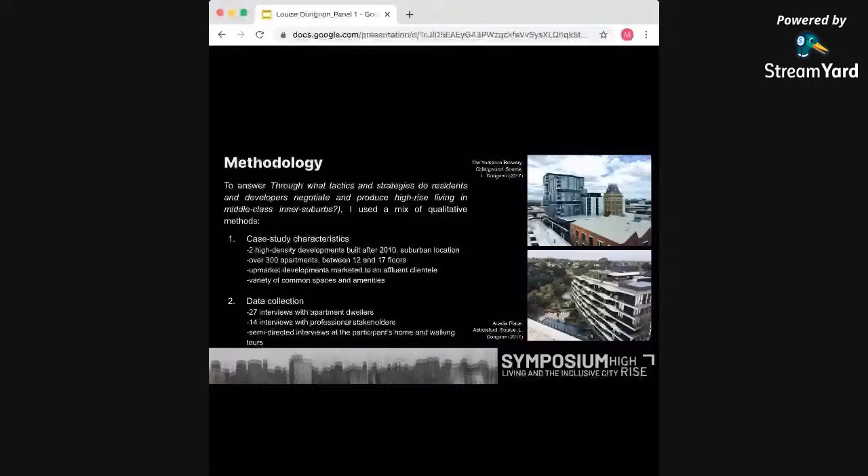To develop the research, she did fieldwork in two high-rise buildings. This is not a very spectacular high-rise building — not the kind of building you see in London or Sao Paulo — but it is very high and has a very big footprint for suburban Melbourne.

The two buildings consist of 12 and 17 floors. They were built after 2010, and they cover about 300 apartments. They are upmarket developments with an affluent clientele, and they have a lot of common space and amenities such as pools and gyms.

Louise did around 40 interviews with apartment dwellers, but also with professional stakeholders. These were semi-directed interviews with participants at home, or during walking tours around or inside the buildings.

The main findings — you can have a look at the thesis of Louise, which is available at the web link on the screen. What she found is that competing actors all work toward the co-production of high-rise living spaces and culture.

So high-rise living is not something given — it is something constructed, and this construction is based on the relationality of the built form, the building, the design, and the kind of people that live in these places, so the middle classes and the status of these middle classes.

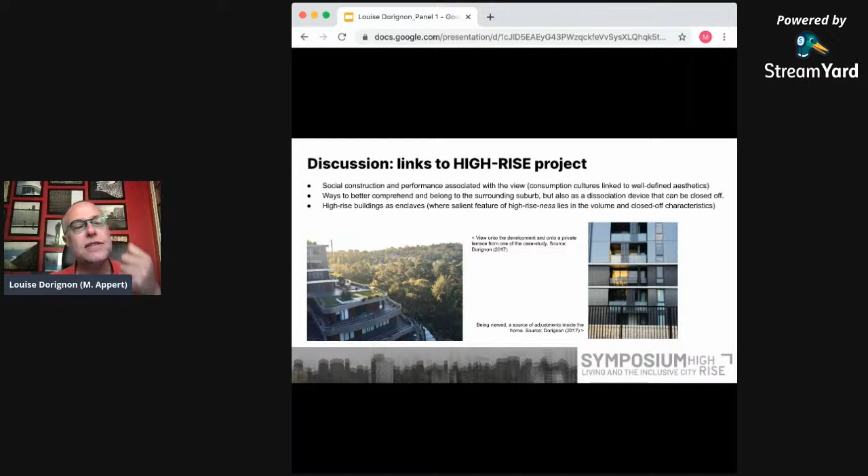And also the view can participate in the interrogation of the high-rise as an enclave, because the view can prevent people from going out or from experiencing other parts of the city, because they have, through the view and through the surrounding landscaping, a lot of attributes that are considered local or also global, but they can attach a value to.

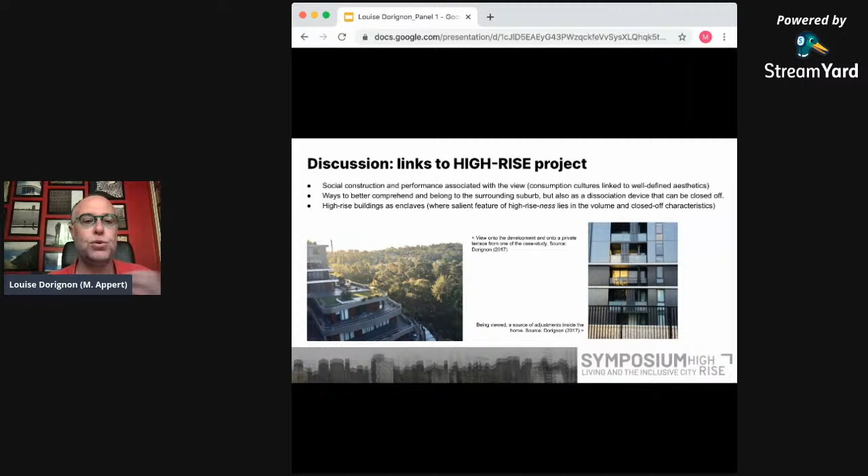And I think I'm done. I'm sorry for the very chaotic way of presenting it, because this is not exactly my work. So I tried to do my best to be as clear as possible, but it is not my initial text. So thank you very much for listening to me.

Thank you very much. It was extremely clear and objective, and I thank you for all the effort to resume and present somebody else's work. Thanks a lot.

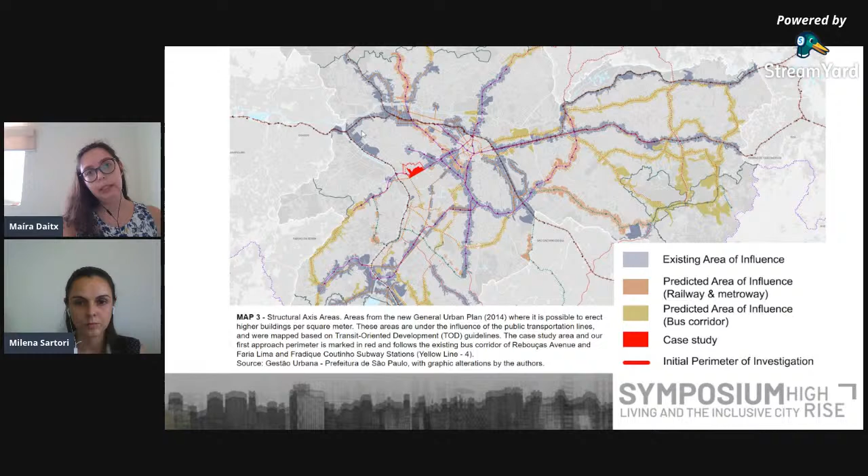So as you can see here, in light blue or purple, and in yellow, are the axes that are supposed to receive more high-rise buildings than the inner neighborhood areas, okay? And our area is one of those.

Our area has 2 metro stations. It's already a fully consolidated area, I would say. We have a lot of vertical buildings on the east side that were built mostly during the 70s, and some spread high-rise buildings here on the west side that were built in different periods of the verticalization process of the city, since the 50s.

We have 5 bicycle lanes in red and 3 main streets related to the production of our high-rise buildings recently: Rebouças Avenue, which went through an important landscape transformation in recent years; Faria Lima Avenue, which leads to a financial center concentration here with a lot of business going on, and people living in these areas normally work in areas related to Faria Lima; and Pinheiros Street, which is the area that concentrates the new restaurants and bars of the neighborhood.

And this is a small, low-density area that is now protected by law, so it's under heritage regulation. So this area, which was before within the axis limits, won't be verticalized anymore.

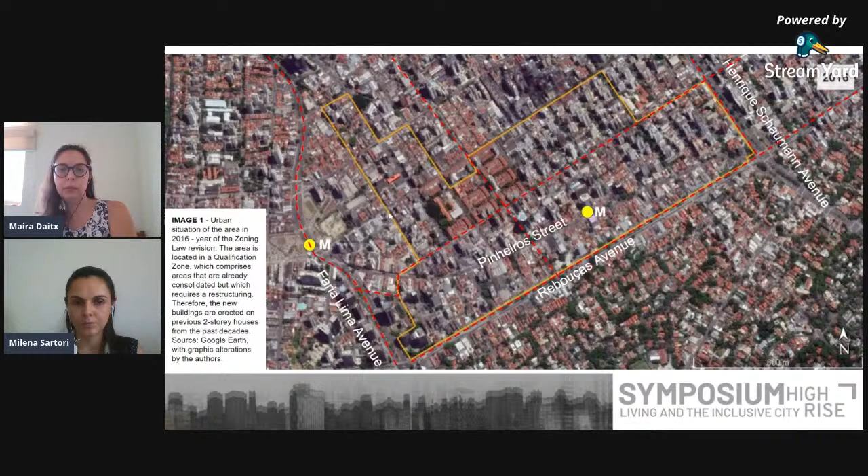So they are more popular, and also this is the part of the area that is cheaper to live.

We have the area that has been through a gentrification process. There were a lot of residential units that were transformed into commercial units, so they occupy both storeys of the buildings, and they have a lot of alternative commerce and also bars and restaurants.

And the old mansions that were concentrated on Rebouças Avenue, in this area of the city, were mostly transformed into offices and clinics.

Along with that, we had a lot of high-rise typologies, old ones. This one is from the 50s period, where you have mixed use. They normally don't have leisure areas, so they are simple apartments with no facilities like swimming pools, gyms, that you can see in the other, more recent buildings.

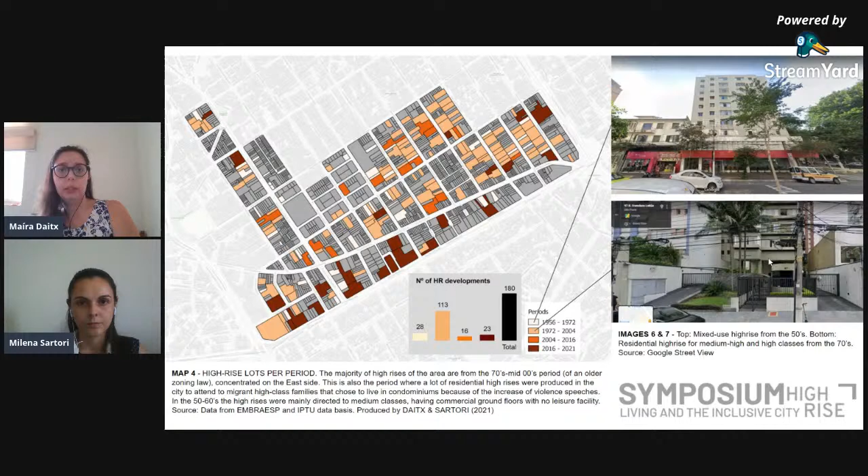The majority of the area has this kind of typology that is fenced or circulated by walls. They are high-income typology, so you have 1 or 2 apartments per story, and they are also concentrated on the east side, which is more residential.

This is the typology of the 2000s, where they are really similar to the one from the 70s, but you normally have a distance from the sidewalk to the entrance of the building. You can create more privacy for the residents, but also it's privately controlled, so this is not a public space.

And this is the most recent typology. As you can see here, you normally have the first floors occupied by offices, clinics, and stores. Part of them is active facade, and the apartments are on top of this basement of the whole building. They are all mixed use, most of them. We only have one that is not, and they all have the same look.

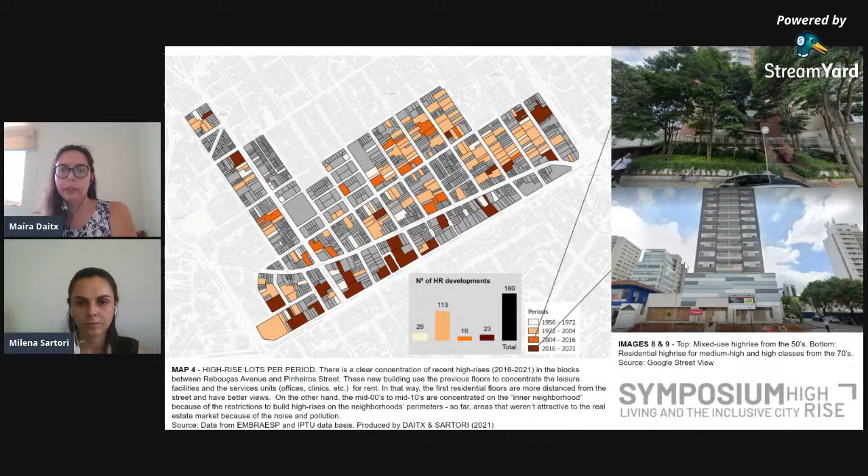So in Pinheiros, you can see normally all kinds of typology in the same block. You have new buildings, older buildings, medium buildings, and low rises from different types of uses in the same block, on the same street.

Sorry, I see part of our presentation is not showing here.

Now I'm going to explain a little bit what differences this new general plan brought to us, and the alterations of the zoning law in 2016, because that in a way directed a lot of the market in our area, especially in the areas I told you about along the Rebouças Avenue.

Our general plan focuses on trying to create sustainable urban development. For that, they decided to disincentivize automobile ways of transportation and incentivize public transportation.

So in the new buildings of the area, they say we have a maximum of parking lots of 1 per housing unit. Before that, it was mandatory to have 1 parking lot per housing unit. Now you can have housing units without any parking lot.

They have a minimum sidewalk requirement, so you can increase the quality of mobility for pedestrians. And they have incentives for donation of part of the land lots to public fruition, which could be on the border of the buildings along the sidewalk, or in the internal areas of the plot.

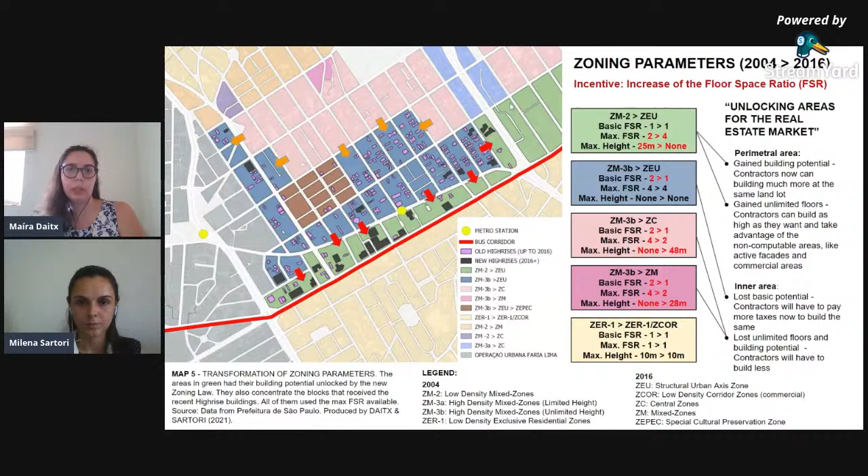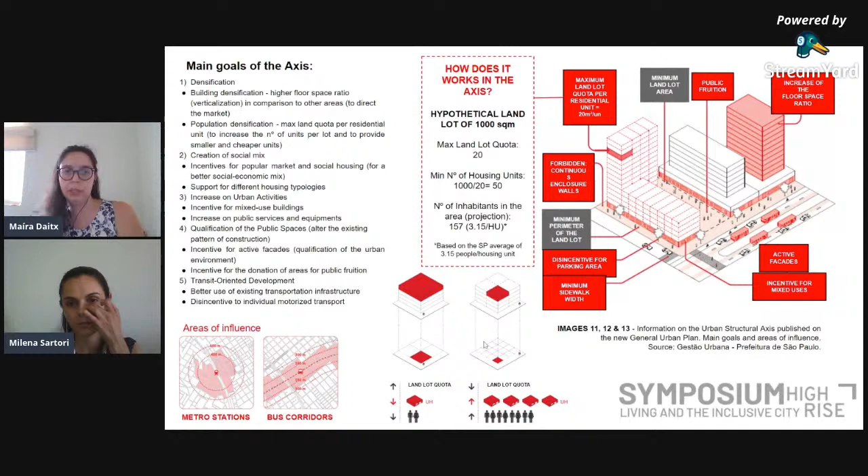Another important increment in the new general urban plan is that they created a minimum number of housing units per land lot. So if you have a land lot of 1,000 square meters, with a max land lot quota of 20, that means you'll have a minimum number of housing units of 50, which increases the density of the area. So compared to before, you can have more units for the same area of land.

We evaluated how this land lot quota was present in our area, even before the implementation of the law. We saw that in the areas on the east side, which have unifamiliar and exclusively residential high-rises, the land lot quota is really high. So you have a lot of apartments that are really big, with only 1 or 2 per floor. Their areas are bigger than in the other part of the zone. So this is not the ideal neighborhood that the new general plan wanted.

They created incentives so that contractors could create new high-rises with more units, and the new buildings correspond to that demand. As you can see here, the average land quota per period decreased a lot in the most recent period of the zoning law. Also, the number of housing units released in this recent period is almost equal to those released during 30 years of the previous period.

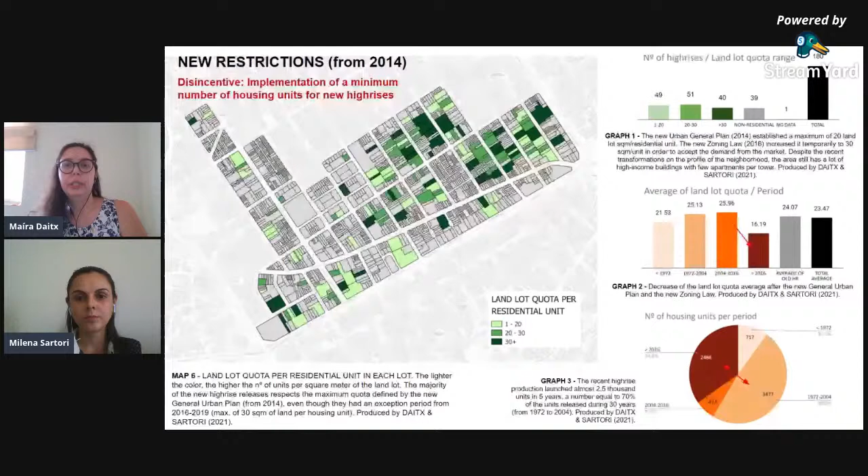Another goal of the general urban plan was to create a socioeconomic mix and include social housing and popular market housing in the central areas of the city, including the axis areas. One means to that was also the land lot quota, where once you have a minimal number of units, you would create smaller units, which would also be cheaper, so people could afford them more easily.

We know this didn't happen, at least not in the area of Pinheiros, because even though you have smaller units, this is the minimal area of the high-rise buildings. So you have apartments with 22 square meters and apartments with 240 square meters. You have micro housing in the area, but also a lot of big housing apartments. The price of these units is still not under the limit that the public bank can fund, so we wouldn't call that popular market housing.

So even though you create really small units, that doesn't mean we'll have a socioeconomic mix in the area, because these small units are actually being sold to high income classes, or to private investors. One example is that our area has private buildings owned only by a company, not sold to the population. The company manages all the apartments for high income rent. The result of this is that we don't have a social mix in the area, but we do have the implementation of different lifestyles, because the people who live in these buildings normally have higher mobility from one city to another, which confronts part of the lifestyle already present in the area.

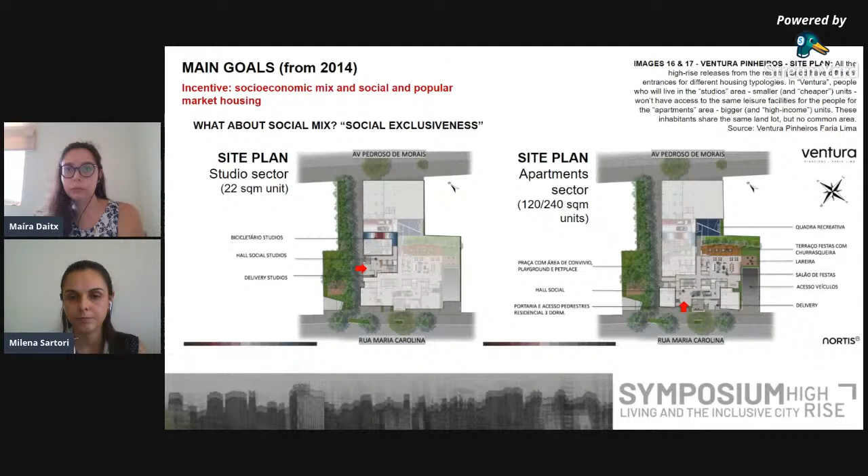Another important point of the new general urban plan was to incentivize mixed uses on the axis areas. As we can see here in pink, all or almost all of the new high-rises were mixed use. They have housing units, but also areas for stores on the ground floor, and some had offices or spaces for meetings and clinics to rent on the first floors. This was an actually really interesting upgrade from this new general urban plan.

But what we saw when visiting the areas is that part of this mixed use is exclusive for the dwellers of the buildings. So you can go to, for example, a restaurant on the ground floor if you're a normal person, but the people who live in the building can have access to the same meal in their own apartment. So they have this kind of differentiation.

Another thing is that there are some new high-rises where the ground floor was transformed into a mini mall—a mini shopping mall that is privately controlled. You don't have a direct relationship with the sidewalk or the public space. And that reproduces the exclusivity logic that we have in our cities.

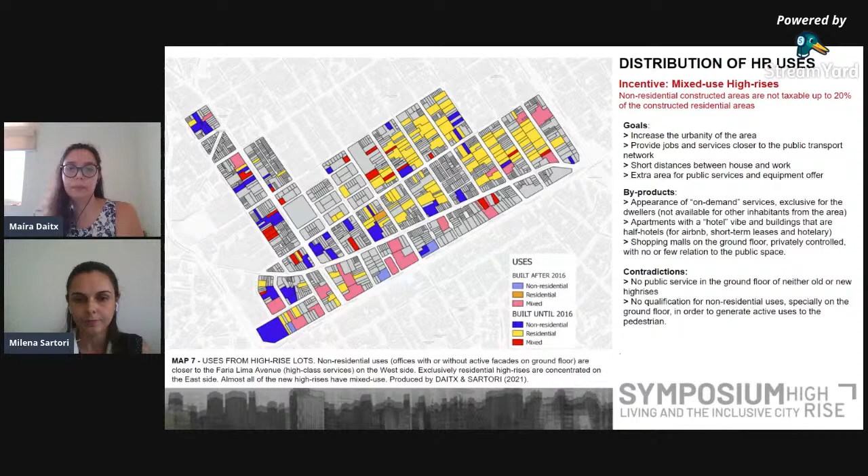Well, the qualification of public spaces at the building level takes place based on four main parameters: the donation of areas for fruition, the establishment of a minimum width for the sidewalks, and the incentive to active facade with consequent restriction on wall closure. The donation of areas for fruition has a counterpart—a discount on the onerous grant.

Although the donated area may be inside or on the sides of the lot, all 80 buildings that donated area in the case study did so in alignment with the sidewalk, probably aiming to reach the minimum width established for the sidewalks of 5 meters, in which the front setback of the building is not necessary. Besides that, the vehicle access to the building does not need to be compartmentalized by uses, providing a continuous sidewalk.

However, the new requirements are applied only to the new buildings, so it will not necessarily result in a continuous improvement of the sidewalk and public space.

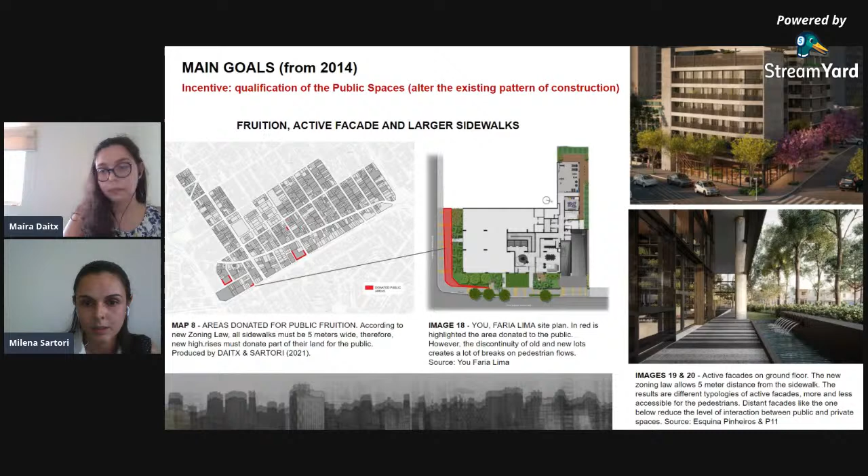That is the example of the White 2880 building. Its implementation exemplifies how the concept of an active facade is interpreted in the legislation. Even with flower beds, vehicle circulation, and parking spaces in a 5-meter range between the alignment and the facade, it can be considered active as long as it has opening and visual permeability to the street and is physically integrated into the public sidewalk, with unrestricted access without any type of closure.

Although the general urban plan brings proposals for fruition to break with the logic of the traditional lot, we see that this logic persists.

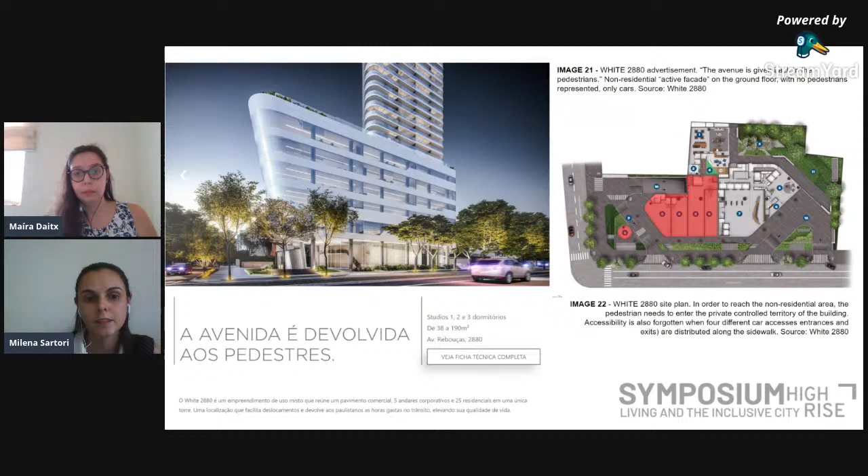About the disincentive to individual motorized transport, the regulation predicted a limit of 1 parking space per housing unit, whose area would not be calculated as built area. This incentive aimed to reduce the number of parking spaces per building, and even if the numbers indicate a drop, the results cannot yet be properly evaluated since this determination was not active between 2016 and 2019, being replaced by a limit of 1 parking space for each 60 square meters of area—a value currently requested in the review of the General Urban Plan.

However, what we observed in the buildings of the area was the reallocation of parking spaces destined for studios to larger apartments that maintain the standard of 2 or 3 spaces per apartment. Since the typology of studios was intended in most cases for people living alone or for temporary rent, it was considered that their demand could be supplied by public transport.

In addition, one of the axis's proposals is to encourage alternative forms of transport, which is why part of the public investment was destined to the construction of the cycle lane that connects Rebouças Avenue to the existing cycle path in the city, and to the installation of bike racks in some subway stations, like Fradique Coutinho.

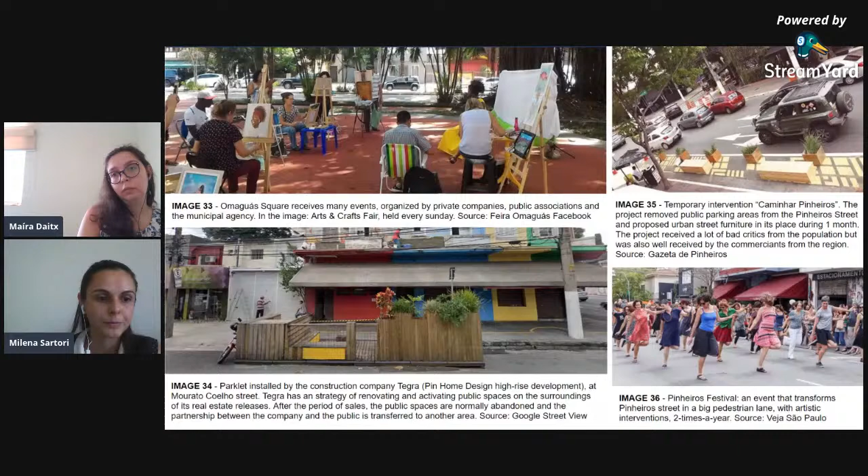I actually went to Lyon and other cities in Europe to investigate this type of practice. Here in Brazil, or especially in our area, this is the only site that received temporary forms of appropriation in an area that will have a high-rise now.

It's important to highlight, however, that this more recent occupation of the public space coexists with other forms of occupation that remain present, legally or illegally. Although the regulation of the urban structural axis defines the need to implant popular markets with areas for street commercial and complementary uses in areas with large circulation of people, there has been no initiative in this direction so far, so that informal and irregular occupations of the sidewalk continue to coexist with the activities already regulated by the Legal program.

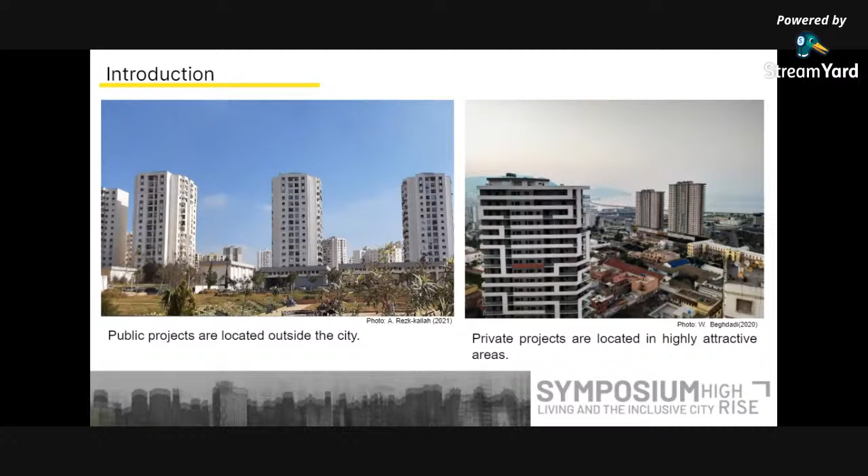In this context, a vast construction site of large urban complexes with high density is being created on the outskirts of the city, composed of various programs of social and promotional housing produced by public actors. On the other side, the arrival of private real estate development has marked the urban landscape of Oran through the construction of residential towers, led by private actors located in highly attractive areas where the price of land per square meter is higher than average.

This verticality is organized in the form of clusters. We can see the concentration of towers in the central districts, the eastern districts, and the maritime fringe where we find the tallest tower. We also see a more punctual distribution around the major axes.

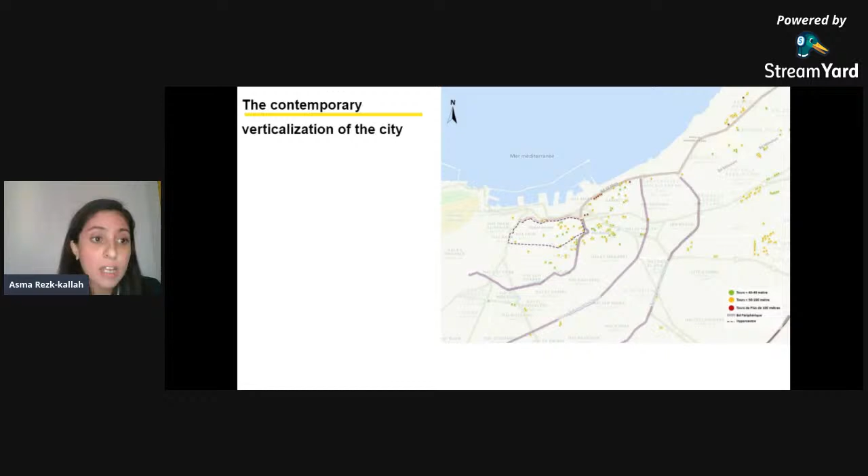This concentration of towers seems to be determined by certain factors: firstly, the type of actors, as seen in the previous slide, but also the opportunity, the attractiveness of the territories, financial benefits, and the development of road access.

In our study, we are particularly interested in the central districts dating from the 19th century, marked by the second ring. These districts are facing strong verticalization real estate pressure, where private actions took precedence over public actions, and the districts now undergo transformation due to a speculative real estate market based on land and financial opportunities.

In our presentation, we will take the example of two neighborhoods: Gambetta and Galech. These two districts have similar morphological and social characteristics.

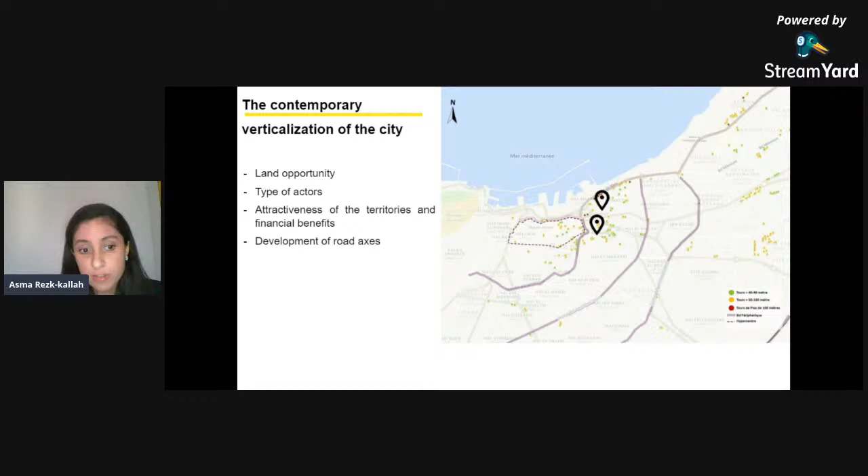The landscape of this neighborhood is characterized by the presence of various types of buildings, like dilapidated constructions occupied by the lower income population, modest constructions, and high-standing residences like towers or villas occupied by a well-off population. This variety of housing typologies is indicative of the diversity of populations in these districts.

The built environment is marked by the strong presence of individual houses with gardens, giving the landscape an open aspect with low density.

These neighborhoods are under strong real estate pressure because of the living environment they can offer, their geographical location attracting many buyers, their residential character, the views of the sea, and the proximity of many services.

The other reason is access to land, which has encouraged the verticalization of these neighborhoods. As we can see in the image, on the wall of some houses we can read the inscription 'for sale,' which testifies to the extent of the renewal that the districts are undergoing.

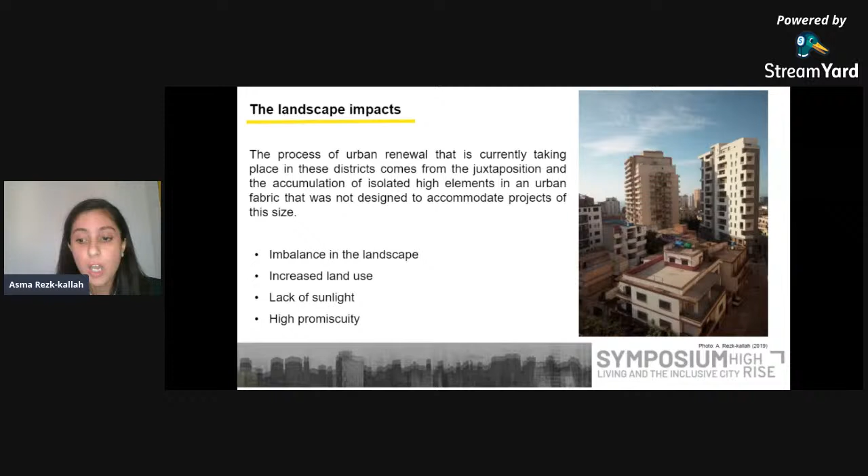However, the alteration of certain landscape elements due to the eruption of the tower will not be experienced and perceived in the same way. That's why, in order to collect the different perceptions related to these towers, we conducted 5 interviews with residents who live next to the tower. Of these interviews, 3 of the houses have a garden and 2 apartments have large terraces.

For example, this image you can see on the slide was taken from the garden of a resident I interviewed.

From these interviews, it appears that the tower's impact on the life of residents occurs at two moments: during construction, with the nuisance of the construction site, noise pollution, and impact on their garden because of pollution from the construction site, which has affected the vegetation in their garden.

On the other side, we have the impact after construction, high with the problem of high promiscuity, lack of sunlight, the composition of the views, and the color of the landscape with the disappearance of views to the sea and the mountains.

Some points have been mentioned as positive changes, like impulse for new dynamics, more varied shops, new services, and a change in the image of the district and the town.

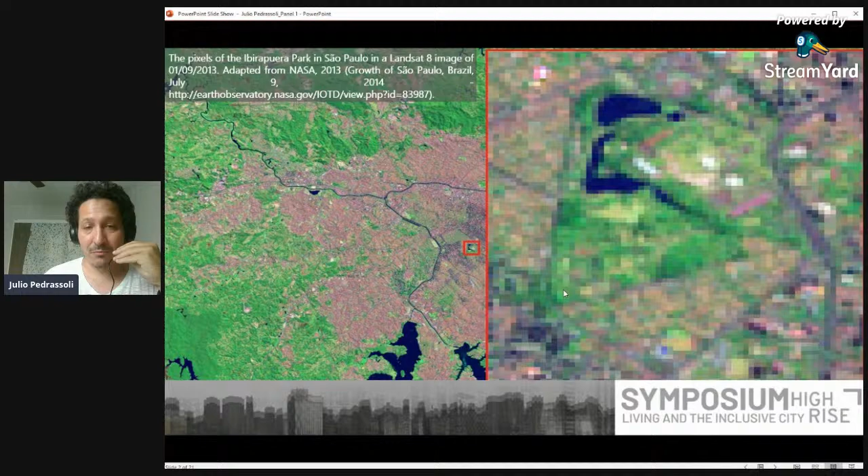So to start, I would like to start with two questions. The first one: is it possible to relate the records of change - the changes in the materials of the surface in terms of land use, land cover, when you think about image classification, that's something most of you already know - to a much more complex thing, the processes that drive these changes and the physical structure itself? And can you at least see it from space? I'm talking here about using satellite images like Landsat, looking from about 700 kilometers from space to the ground, considering the average sea surface level.

And if this change can be seen from space, can we estimate the patterns of at least two kinds of urban occupations that are very common in Brazil, and even more common in São Paulo metro area: the formal and informal areas. About informal areas, I'm talking about slums. I'm not going deep into slums here, we'll have other chances during the symposium to discuss it, but I will focus more on the formal area, and a specific type of formal area that is the verticalized one, the vertical urbanism.

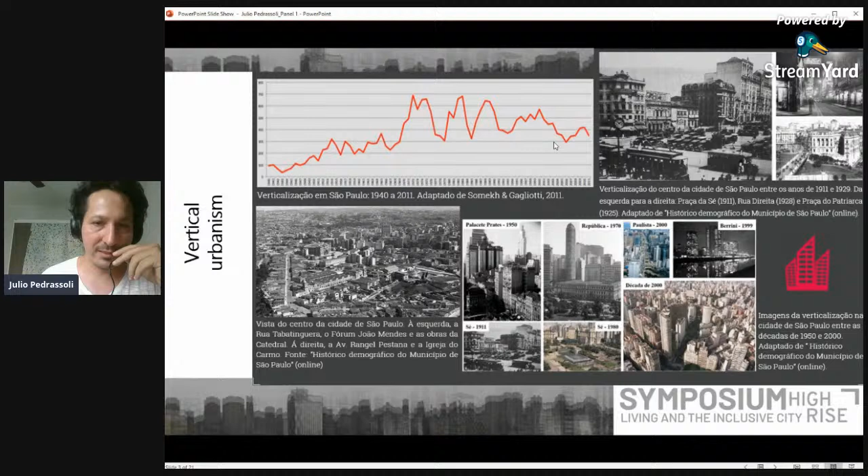So from the 1940s to 2011, looking at how many elevator permits were received by developers to put elevators in buildings - not just new buildings, but installations - is what we call a proxy. I'm talking about this because everything I'm going to show you is about proxy. I'm using different kinds of data, trying to approach the problem not directly, but trying to infer the verticalization from different sources.

Before going into remote sensing, what I want to show you relates my work to the premises of the Highrise project, especially the Brazilian part, where we were able to spatialize much more - it's a different approach, much more about trajectories on the French side, but in Brazil we were able to make some spatial analysis and different stuff.

So to approach the problem and try to associate what I'm trying to see in the image, I will talk to you about two, actually three things. The first one is the vertical urbanism growth rate, or how fast some parts of the city are becoming vertical. And I will try to associate it to a different thing.

It's how much the purchasing power increased in other areas of the city. And if both things occur together at the same time, and are spatially related, occurring in the same spots as the presence of real estate releases, I can filter it in space.

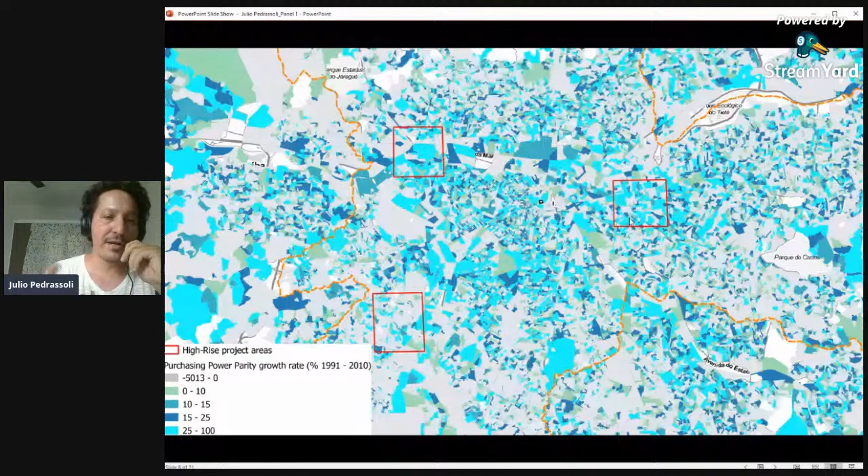So at some point it's quite stable, this very whitish area, but the bluish areas are where the income actually grew, considering the purchasing power parity. And these big red boxes here that I talked about when I started, when I asked Manuel to give me some examples, are actually areas where the high-rise project in Brazil mapped a lot of vertical residential high-rise buildings.

This is part of the database and the analysis of the project. So we have Vila Anastácia, Tatuapé, Vila Andrade, and well-known areas of gentrification that we expect to be gentrified areas.

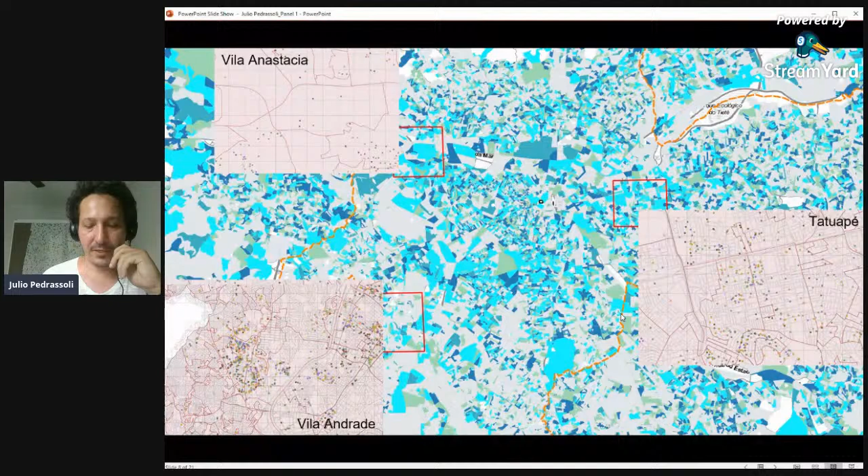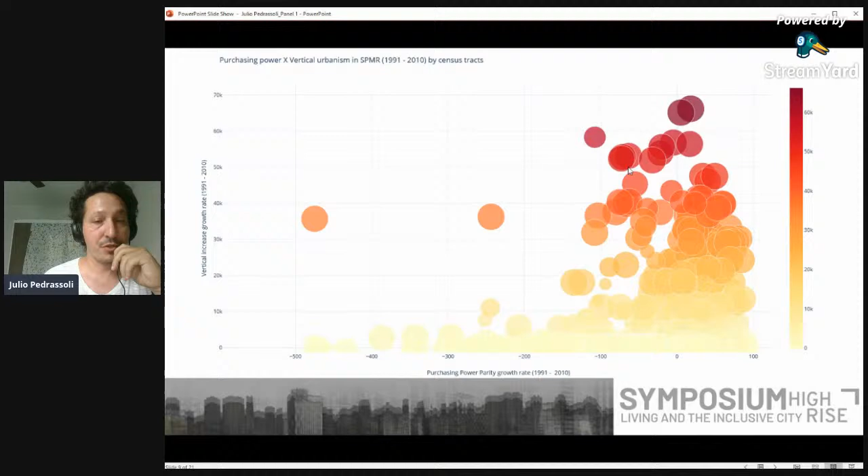What is interesting is that when you combine both things, and of course a third thing, the real estate release, some of the census tracts stand out. This is what I expect to see in the map if I combine the two mathematical models I brought to you before: areas where the verticalization growth rate is very high, and at the same time the purchasing power parity is also very high. And if in the same areas the phenomenon of real estate releases being launched also occurred, I can consider this a potential study area.

So this is a very high filter to apply. It means the verticalization growth has to be at least 5 times higher than the rest of the city, and the purchasing power parity has to be 25% greater than the other parts of the city. At the same time, the real estate release has to exist at least once in the same period of time. What we get is about 251 census tracts out of approximately 30,000 in São Paulo. So it's quite concentrated when you apply this combination of things together.

This is quite interesting, but this is just half of the story. Not exactly half of the story, but half of my story that I'm trying to show you.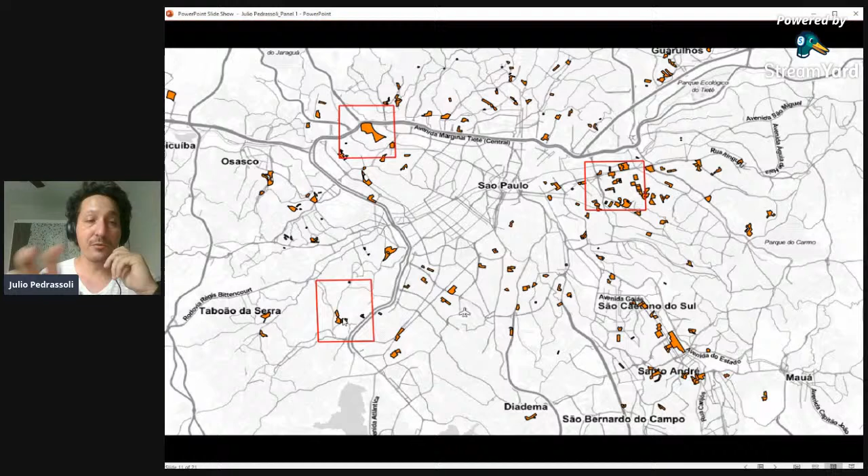What I showed you until here, it's working with tabular data that agencies like the Brazilian Institute of Geography and Statistics collected in the field, asking people, and there's a huge time series you can use to derive this kind of modeling. But what if you don't have this kind of information? How can we approach these processes using not the process itself, but the changes in the Earth's surface that we can detect by looking at a satellite image?

There are many different ways to classify an image, including a satellite image, since some algorithms come from the 60s and 70s. There are the classical ones, and there are more modern approaches like machine learning, support vector machine, random forest, or even more sophisticated ways like deep learning.

Deep learning is not actually considering the pixel itself, but it's considering the context. It's different. It's not like support vector machine or random forest that are just looking at the pixel. But all these classifiers, besides being more or less complex than each other, are kind of binary. In the end, if a pixel belongs to a certain class, that class will be assigned to that pixel.

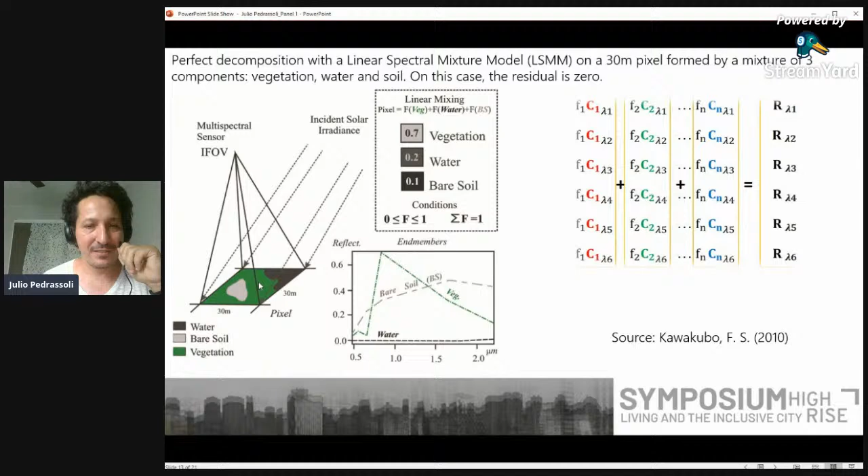You can actually do the same with a pixel. If you look at a pixel, it's just a number, and I'm talking here about a Landsat pixel, 30 by 30, about 900 square meters. You can actually separate it, if you tell the computer what things you think are inside and contributed to form that number, and how much they contribute. It's exactly the same thing as separating the instruments of a music. This is something we call spectral mixture, and we can unmix this spectral mixture model inside each pixel. So in this example, it's a decomposition of a pixel: what is the percentage of vegetation, water, and bare soil that contribute to the number registered in this pixel? This is important because it's a dimensionality reduction, and we can reduce a lot of dimensions into simple dimensions to track over time.

In order to do it, we need to give the algorithm something to work on. Inside a pixel there are a lot of things, and inside a Landsat pixel like this one, 900 square meters, there's not just a block or a house, there's everything inside: rivers, water, houses, high rises, everything mixed together. But you can simplify the land surface into three things, at least for the habitable area of the Earth between the tropics, where more than 90% of the people live. You can think of the Earth's surface as formed by parts that are very reflective, high albedo, parts that are low reflective, low albedo, like water and shadows, where energy comes in but doesn't come out, and vegetation, which is this other separate thing. So this is what we call global end members.

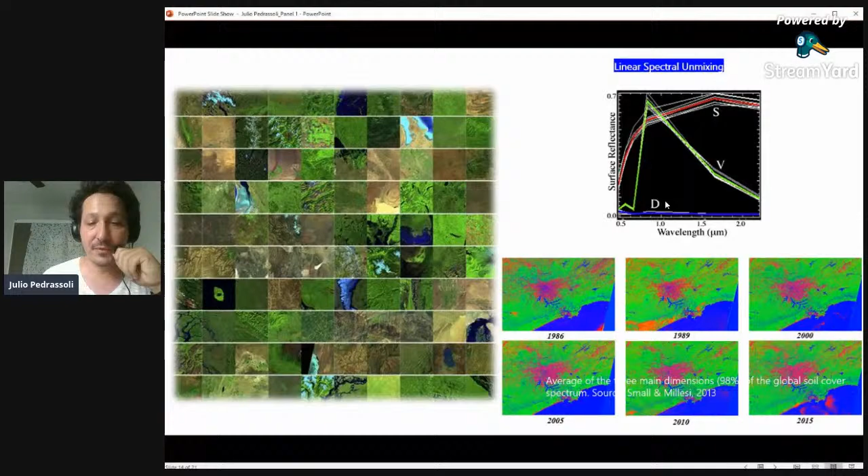Vegetation is vegetation, and dark surfaces are low albedo, like shadows and water. So we can very easily estimate the percentage of contribution of all of these three things in each pixel. Each pixel has its own history now. So in the beginning, I showed you something I was working on, the census data and the real estate points that I showed you.

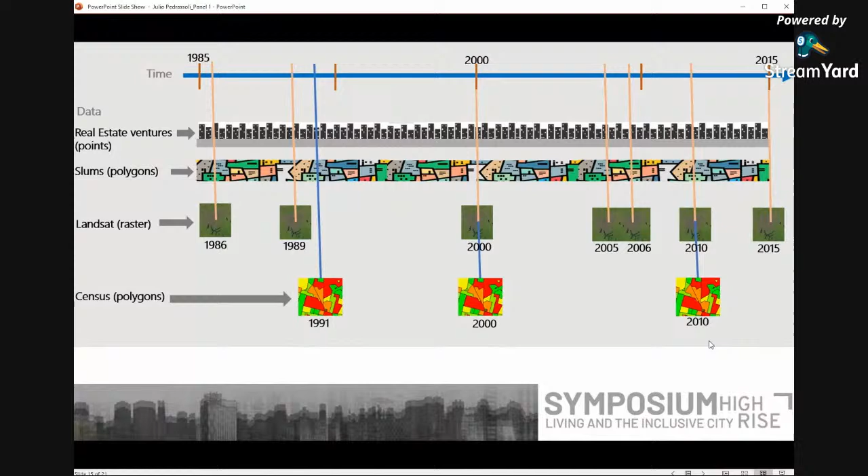I'm including a new layer here, the orbital remote sensing. I'm using some samples of Landsat images, and the choice of the data I can explain later if someone has questions, but it's related to the sun position and guaranteeing calibration between the different times.

So, decomposing all the pixels for the different years in the São Paulo metro area and correlating these values, look at this black line, of shadows that I can extract from the pixels with the apartment types I can extract from the census tracts. This is just a simple Pearson correlation. Most of the correlation is positive. The greater the increase of apartment types from census tracts, the greater the increase of shadows in the image.

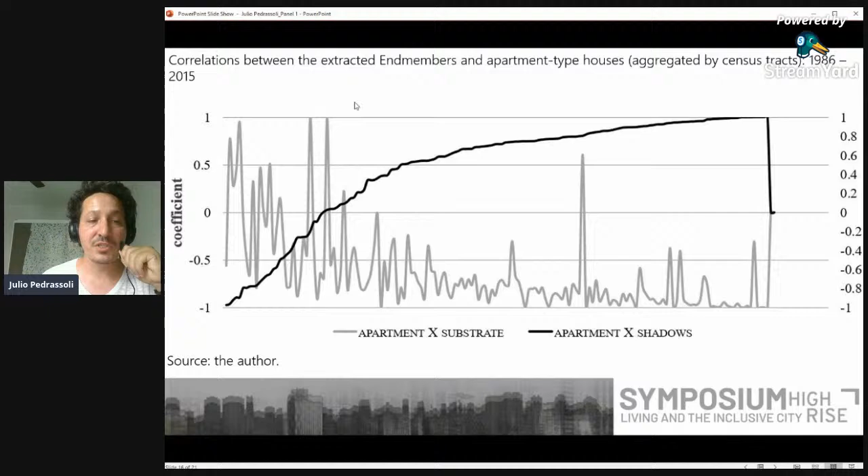Part of it can be explained because we lose the detection of substrate, which would be the constructed area. But high rises, if they are very high, the shadows start to cover what you should detect as a different type of land cover. So this strange correlation can largely be explained by this: high rises generate shadows, and this is why they are very positively correlated. If you look at the image and the census information, they are very correlated.

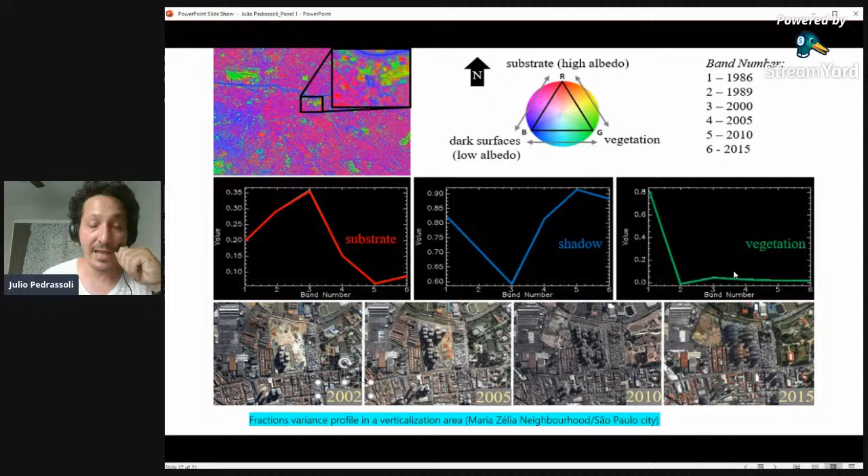This is derived from a time series that I calculated using the end members: how much the substrate changed over time, how much the shadows changed over time, and how much the vegetation changed over time. This is why in the beginning I started talking about how slums have their own signature too, because they actually do. I'm just not showing it here today.

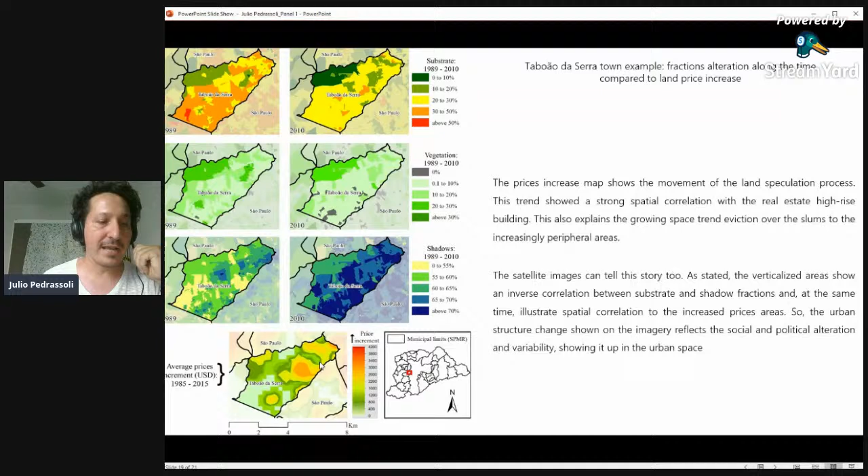Supposedly, if you know very well the relation between these two processes, we can just look to the images and argue that the prices are increasing related to this, at least in this case, because I have the ground truth to show it.

Shadows increase related to price increase, materials, processes. Look into the same image I generated in the beginning. You can see here in Taboão da Serra there are also some census tracts that respond to that mathematical modeling I just created for this presentation. It's not something I'm really working on, but it occurs here and here.

In Taboão da Serra, you also have a high rate of verticalization associated with a high rate of income increase, people moving or living there, in at least 2 points very close to the areas where prices increased and shadows increased. So if I look at everything together, we can see a price increase. The image shows a very similar process, and I'm looking at the shadows because I'm trying to associate it with the verticalization.

This is how I model it. We have a lot of vertical real estate release, investors putting buildings in this area, and at least 2 very expensive ones related to the spot.

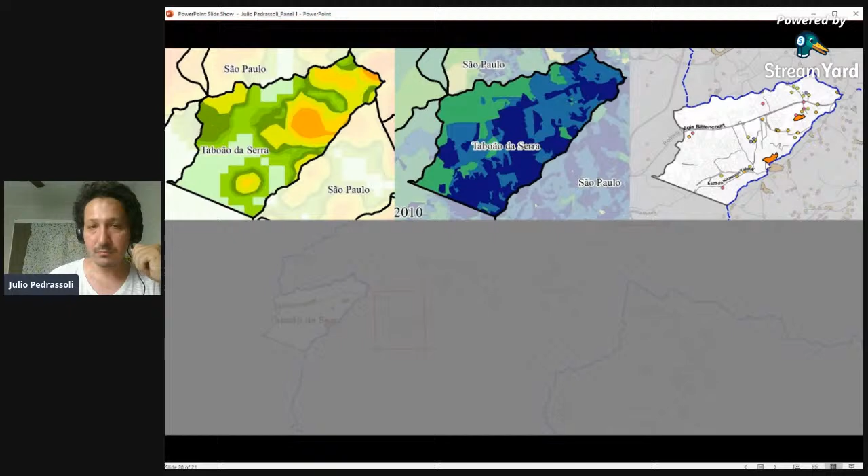So just to finish, it was quite fast actually. What I'm trying to bring to the discussion—I know the discussion will go on during the weeks and other people will present their work, and we have a lot to discuss—but what I can bring is how to model this process that I'm trying to approach, what I'm calling gentrification.

It's not easy, because I'm not even considering that some of the process is due to state intervention, or the state giving the opportunity for this to happen, or even forcing it to happen. I'm not putting this in the model, but just looking at the results of it. How to model and how to detect it—it's possible, yes. It depends on how you understand the model and if the model makes sense.

So, for example, here I'm bringing you a very simple model: vertical urbanism increase plus the money concentration gap increase, multiplied and expanded by the real estate market over time. This is what my mathematical models are showing now.

And is it related to gentrification? Probably some of you will discuss it later. But one thing from the remote sensing point of view, for people who are from this specific area, it's very important to discuss from this kind of analysis.